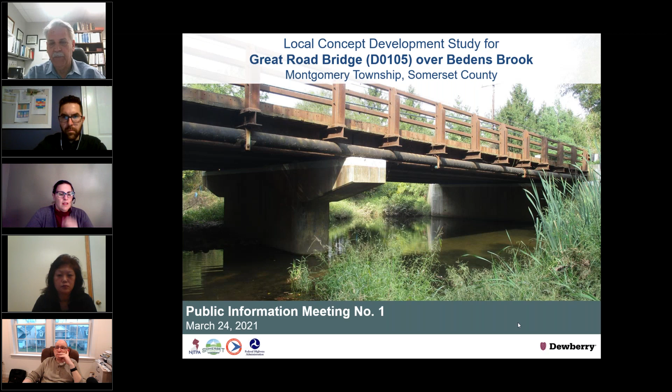Your input is vital. So I'm going to give you a quick overview of what we're going to talk about tonight: a little bit about the actual local concept development process and the environmental process, and kind of where we're at in the project. We're very early on in the life of this project, but I'll bring you up to speed on what we've done so far and who we've spoken to previously.

We've met with local officials in a similar format, as well as with stakeholders who are folks that live within the immediate proximity abutting the bridge site itself. You heard Nicole talk about a purpose and need. That's critical to this process, and I'll get into that a little more so you can understand where that fits with everything.

We'll discuss where we're going after this, because this is the initial phase of the project. This will not be the only time you'll see us or be allowed to provide feedback on this project—it continues. This public involvement action plan that we've established follows the project throughout its life. So we'll bring you up to speed on where we're going and when we'll meet next.

As Nicole said, I'm with Dewberry Engineers, and I'm the project manager for this job. We were selected to advance the study phase of the project by the NJTPA, in association with Somerset County and NJDOT, as well as staff from Dewberry who are working on this job.

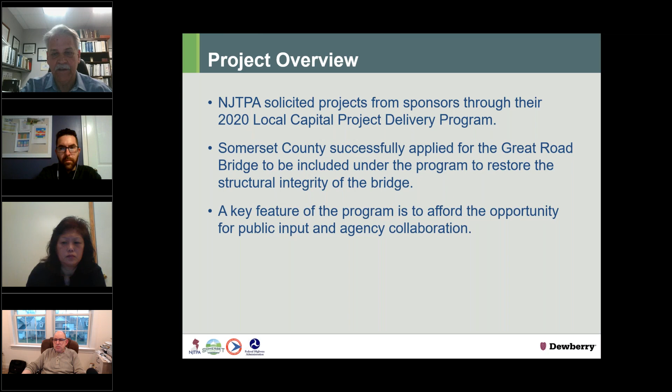As I mentioned, the key factor or feature of both NJTPA's local concept development, DOT's, and the NEPA process is public input and agency collaboration. That's why we're here. We're very early on in the life of this project—we're at the first phase, literally, the concept development phase.

What we're doing in this phase is gathering information—physical data about the bridge, its physical condition, and its environmental setting—so that we can evaluate alternatives that address those conditions and physical issues, as well as making sure we balance and mitigate any impacts to the surrounding environment.

Obviously, soliciting input and getting input from those individuals and groups that use the bridge is critical. That's also why we're here tonight, because at the end of this study, we want to make sure we've gathered the appropriate information and vetted different alternatives that are viable.

Ultimately, when the project graduates from this phase and proceeds into the subsequent phases shown here—local preliminary engineering, final design, and ultimately construction—we want a preferred alternative that has public support and no fatal flaws, so that when the project moves to the next phase, we don't have to reinvent the wheel or go backwards because we missed something.

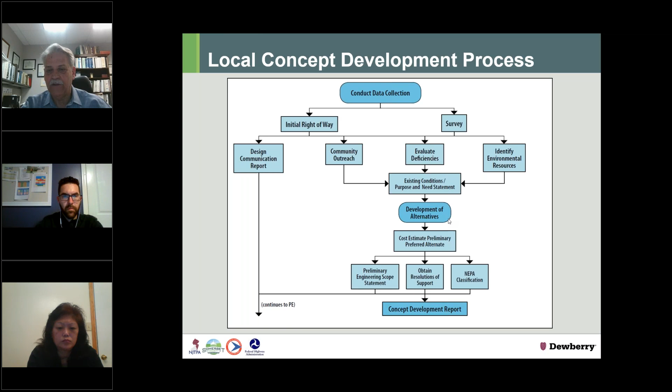What are the goals we want established along those lines? We gather that information so that we can evaluate different alternatives, come up with a recommended alternative, and then we will be back to present that recommendation to you and the options that we vetted so that you can be fully cognizant of the process.

I mentioned that the job is through NJTPA, it is federally funded, so therefore it must comply with NEPA, the National Environmental Policy Act, which means we must account for and mitigate impacts to environmental resources at the project site. A critical factor in NEPA is making sure that we reach out to the public and get your input.

But let's talk about the project at hand. I won't go into great detail. I know that probably everybody on this call knows the bridge site. You may not have seen it from the side, you may have just driven over it, but we'll give you a little bit of an overview of the project site. Great Road, or 601, is a major north-south corridor.

We are studying the bridge that crosses Bedens Brook. We're about halfway between Cherry Valley Road, as you can see here, and Georgetown Franklin Turnpike. The Great Road is obviously a major thoroughfare, a huge alternative to 206. A lot of people use it to bypass 206, and therefore it carries a lot of traffic.

As you can see on the aerial photo, the west side of the project site is dominated by residential communities associated with Cherry Valley Country Club, the Homeowners Association, and Bedens Brook Club, whereas on the east side it's more dominated by private ownership of farm-like settings.

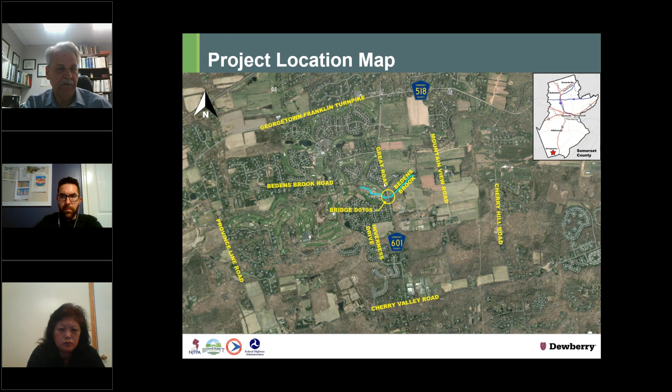If we zoom in a little bit more now, I've reoriented you in the aerial photo. In the previous aerial photo we were looking north, but in this next blow-up of the site, north is to the left. Again, on the west side we're dealing with a lot of heavy residential community, whereas on the east side it's more of a farm-like setting. The bridge site is really dominated by Bedens Brook and its abutting property.

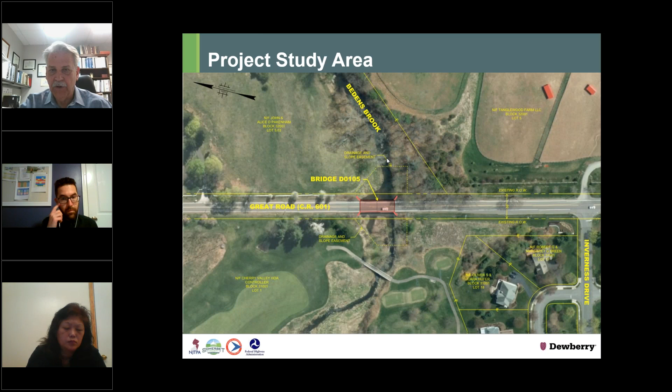As I mentioned earlier, the environmental conditions will be critical to assess here. The bridge itself was built in 1983.

Unfortunately, this bridge is only about 38 years old. That's really what's driving this, because today, as bridge engineers, we strive to get 75 to 100-year life expectancies out of our bridges, so that we can minimize the amount of time we have to go back and do repairs and minimize disruption to the traveling public.

Since it was built, the county has also done a major rehab in 2008, 13 years ago, when they came in and did major repairs to the bridge deck itself. Then subsequently, as recent as 2018-2019, they had to come back and do repairs to the structural steel and some repairs to the substructure.

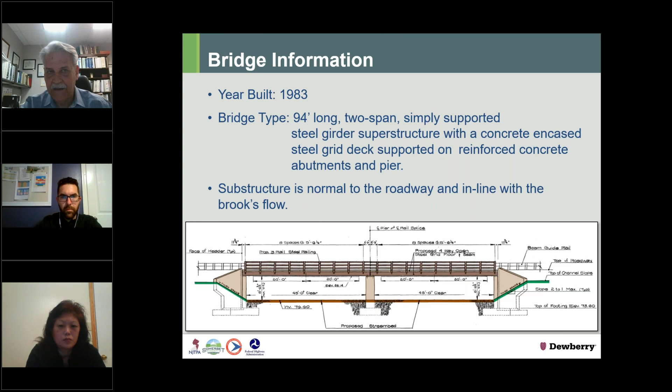So that's really why we're here tonight. The county does not want to have to continue going back to repair the structure. They want to get it taken care of, so that we don't have to do this again and inconvenience folks using this project and using this bridge.

The bridge carries Great Road 601, as we mentioned. The road itself is classified as an urban collector with a 45-mile-per-hour speed limit, so there's a lot of traffic using it and its speeds are fairly high. But you do have a rural setting here, and a very tangent alignment. So it's really not a question of whether there's a history of accidents here. It's purely being driven by the condition of the bridge.

The bridge provides a 30-foot roadway, which is consistent with the approaches, a 12-foot lane in each direction, and a narrow 3-foot shoulder across the bridge. As you can see, there's no sidewalks on either side.

As I mentioned, part of the data collection, in addition to gathering data about the physical condition of the structure, we also want to make sure we gather information about the setting the bridge is within. The site is dominated by Bedens Brook and its abutting wetlands. As you can see, we've got wetlands surrounding the project, and that wetlands provides potential habitat for T&E species, threatened and endangered species, which I'll show you a slide on in a second. But in addition to the physical attributes of the environment, we also look at the cultural resources or cultural sensitivity of the site.

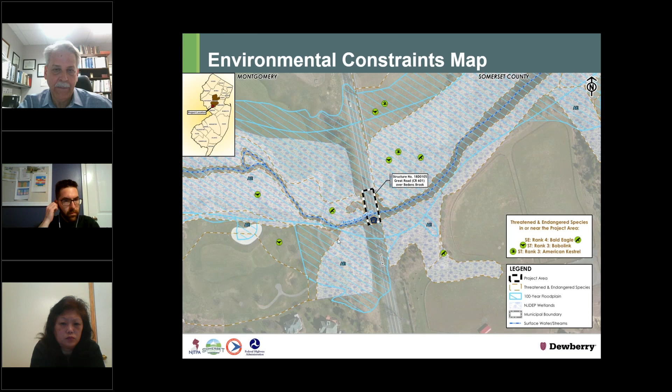So we want to make sure that not only are we addressing physical conditions, but that part of that physical condition is environmental. You'll also see these little symbols for birds and such, which notify us that there is potential, and it's been recognized, habitat for certain species.

In addition to the environmental issues and constraints at the site, the bridge also functions not only by carrying vehicular traffic, but also as a link that carries utilities. It physically carries a gas main on the east fascia, and there are aerial lines along the west side of the road. As we look into alternatives and solutions to maintain traffic and restore the structural integrity of this bridge, we have to be cognizant of these utilities, so that we accommodate them for the owners and for the benefit of the public. There's also a water line that extends down the west side of the road.

Through outreach with Montgomery Township, we know the township is proposing an extension of their sanitary sewer system with a new sanitary line that will run along the same side of the road as the gas line, on the east side. We've already reached out to the township and their consultant regarding that.

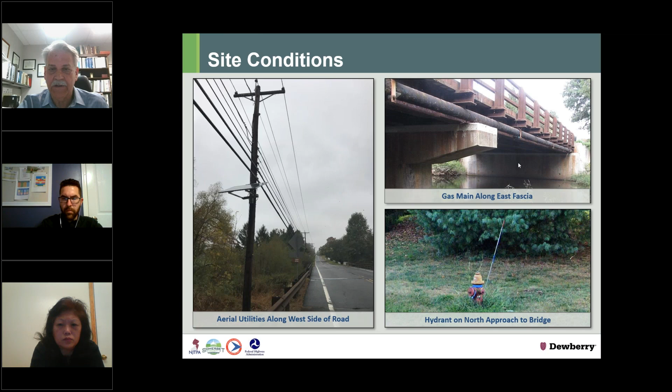We make sure that's accommodated in this project. Again, what's driving the condition of the bridge is just that, it's in poor condition. That's why we're here, and that's why the county proposed this project for funding and studying.

The bridge is classified as structurally deficient. Every two years the county is required to inspect their bridges. Just because it's identified as structurally deficient does not mean it's unsafe to be carrying traffic. That's not the case at all.

What this is telling us is that one of the main physical structural components—these photos clearly show the steel girders supporting the bridge—it's the physical condition of those elements that's driving this project. That superstructure rating is 4, meaning it's in poor condition, and that's why we're here.

The substructure is in relatively better, good condition, but given how the structure was originally configured and built, we had some concern with the condition of the foundations and substructure, the concrete elements you see here.

The condition arose because the original bridge was built with an open grate deck. Any water and de-icing chemicals carried onto the bridge by vehicles came right through the deck and saturated the steel stringers. Over time, exposing steel to de-icing chemicals and weather causes rusting, and that's exactly what's driving the physical degradation of this bridge.

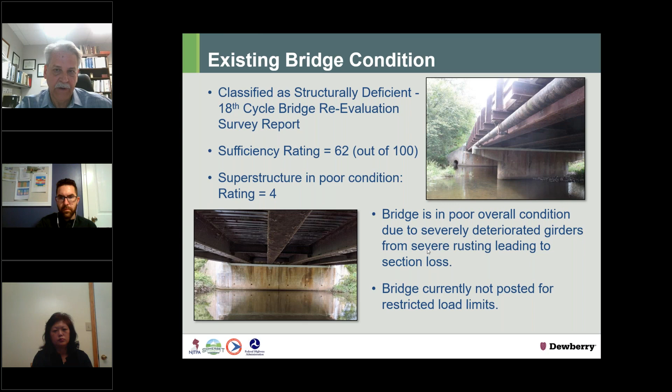These photos show what was driving those repairs. As you can see, the stringers are heavily rusted, with portions that had holes directly through these main members, which carry the loads of vehicles crossing the structure. That's why the county has been out here.

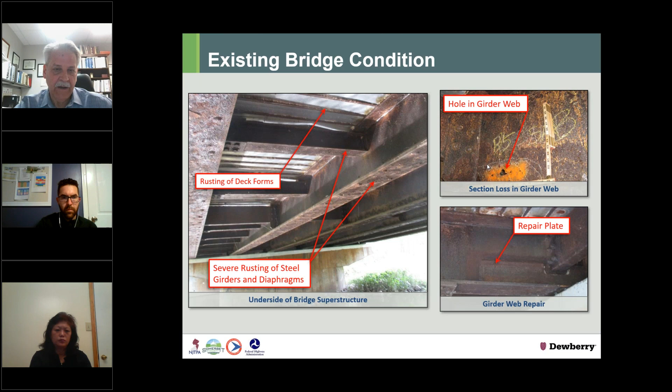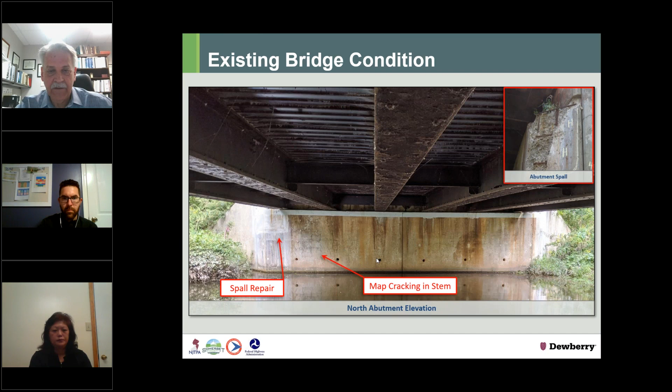Similarly, they had issues with the substructure's concrete elements that support the superstructure. These were exhibiting typical deterioration from exposure to de-icing chemicals and the environment in general—cracks, spalls. So the county has had to go back and make those repairs as well, which they've done.

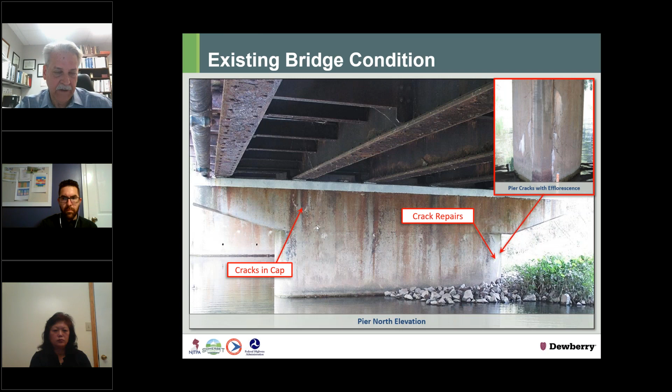Just a couple more photos to show the typical issues this bridge is facing. That's why the county has had to go back. They're studying this now so they can resolve all these issues and not have to go back for the next 50 to 75 years, or 100.

We're here today because we've gone out and collected data and started evaluating some of that information. As I mentioned earlier, we also developed a public involvement action plan with Nicole's help from Stokes' side so that as this project advances, we maintain that connection with the public.

We've had meetings with local officials to get their initial feedback—that's how we learned about Montgomery Township installing the sanitary force main, and we want to make sure they're aware of what's going on. Similarly, we've met with community stakeholders who immediately abut the project site to get their initial feedback and input, and that's why we're here again tonight. So you heard a little bit about purpose and need.

So one of the things that we use to develop that purpose and need is the information that we've gathered from the folks who we've spoken to already. As you can imagine, from the first meeting with local officials, they're concerned with, obviously, please don't close the road for a long term. The county's had to come back, as I said, a couple times.

We realized that no one wants to be subjected to detours so that this bridge work can be done, which needs to be done. But that was the primary concern. If you can stage the work, please do that.

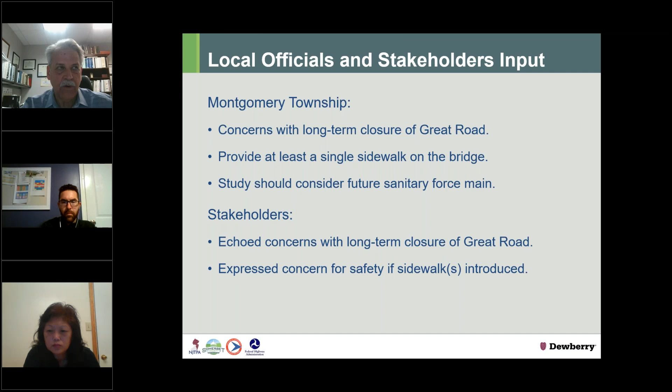So again, that's why one of the main reasons we want to get feedback from everybody is, are people walking here? Is there a need for a sidewalk? Those types of things. Okay, so as I mentioned earlier, the project is driven by the poor condition of the bridge.

So purpose and need, as Nicole talked about, we use the purpose and need to develop a set of criteria that we would then evaluate any of the alternatives we arrive at going forward. And we use this purpose and need to see which of those alternatives has to satisfy the purpose for the project. And then we will also develop goals, which I'll show you in a second, that have come out of these meetings with the local officials and the public. We use that to then establish criteria which we will then weigh these alternatives against.

So bridge projects are often very easy to determine the purpose. The purpose of this project is straightforward: restore the structural integrity of the bridge in compliance with current design standards so that this project restores that capacity, and we're not looking at coming back here in any short term to approach the public about repairs to this structure.

The need are the facts that support the purpose. In this particular case, it's very easy for us to show that there is a need for this project utilizing the bridge inspection reports, which the county is required to produce every two years. We have those reports. Through that process, that classifies this particular bridge as structurally deficient because of the degradation of the structure itself. And ultimately, if that degradation continued, eventually the county would have to close the road because of that deterioration, which would get to the point where it's unsafe to use the structure.

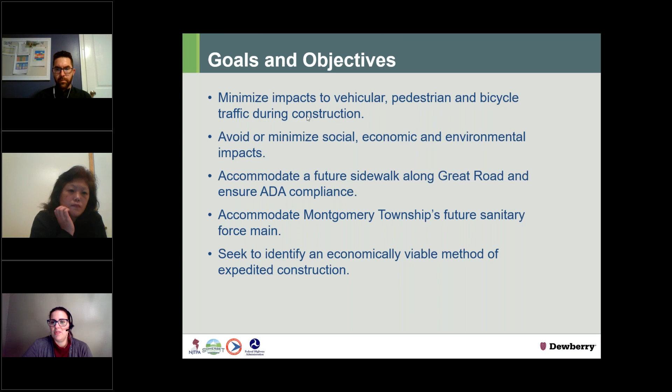That is the project's purpose and needs. The purpose of tonight's meeting, as we've said before, is to confirm those statements, so we're looking for your feedback regarding them. What I'm going to do now is go right to our chat box and address some of the points already made.

The first question asks: does the purpose of the new bridge have anything to do with a potential creation of a Highway 206 Princeton bypass, similar to what was constructed in Hillsborough? For example, will the bridge be built to potentially handle four or more lanes?

This is Rick. The purpose of this project is not being driven by capacity of Route 601, Great Road. I don't want to speak for the county, but what's driving this job is the physical condition of the bridge. It's not being driven by the road being too narrow or inadequate for the volume of traffic. So no, the intent is not to add lanes to County Route 601. The intent is predominantly to restore the structural integrity of the bridge. Lily Sue is on for the county, and I'm sure she can add to that. Yes, you're correct — this project has nothing to do with 206.

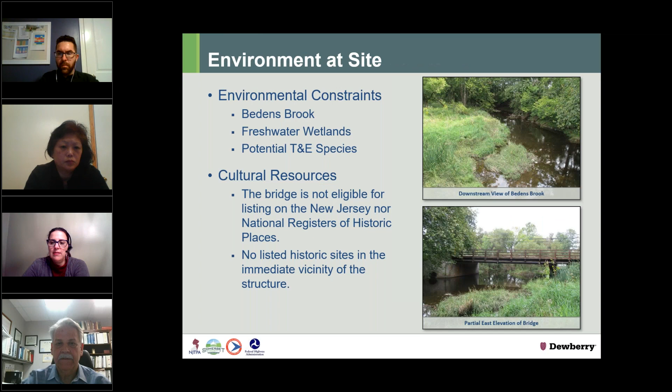Great, thank you Rick. Would you go back to the slide with the LCD study, the 4 phases? One of the questions that came in is: what is the proposed timing of this project? I thought this would be a great visual to talk about how long this phase will take and then talk about the next phases.

Then we'll come back and present those options again to local officials, stakeholders, and the public to get feedback. The goal is that when we walk away from this phase of the project, we have what's called a preliminary preferred alternative, one that everyone who wanted to voice their opinion has had that opinion heard and vetted, and we have an alternative that has public support and meets the purpose and need, so it can graduate from this phase to the next.

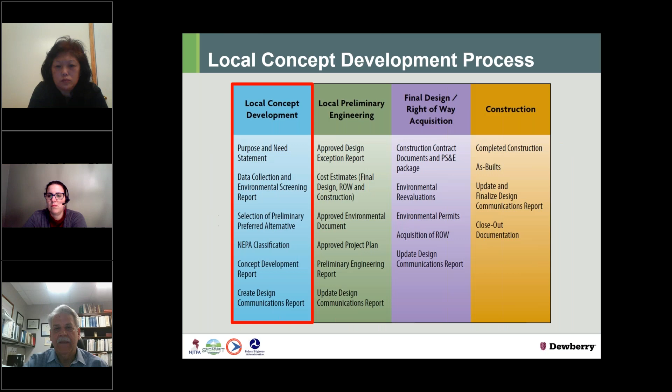Great, thank you Rick. And I know we haven't gotten into the actual designs yet, we talked a bit about coming up with some ideas and presenting them later on in the study. But one of the questions is, will the shoulders be widened through the bridge section? Well right now, as I mentioned earlier, the roadway is classified as a major collector. And what that means from an engineering standpoint is, depending on how the roads are classified, is what they're required to carry from a design standpoint.

In other words, we would look into just that. What's the width of the lanes based on the current design criteria? How wide should the lane be? How wide should the shoulder be? For this particular roadway, the shoulder should be 6 foot. As a matter of fact, that's exactly what was used further north on the bridge I mentioned earlier on 601. So at the very least, the roadway section across this bridge will be widened such that this 15 feet, which represents a 12-foot lane and 3-foot shoulder, would be increased so that it would be a 12-foot lane, 6-foot shoulder at a minimum.

And then if we're talking about adding a sidewalk, minimum desired sidewalk width is 6 feet. So, in essence, yes, the shoulders in the immediate proximity of the bridge would be widened.

And then we would transition back to existing conditions, because again, the focus is to restore the bridge, not construct improvements all the way along Great Road.

And in those options and things that we're going to be coming up with later in the project, later in the year, one of the questions is: is no additional near-term repair one of the alternatives being considered?